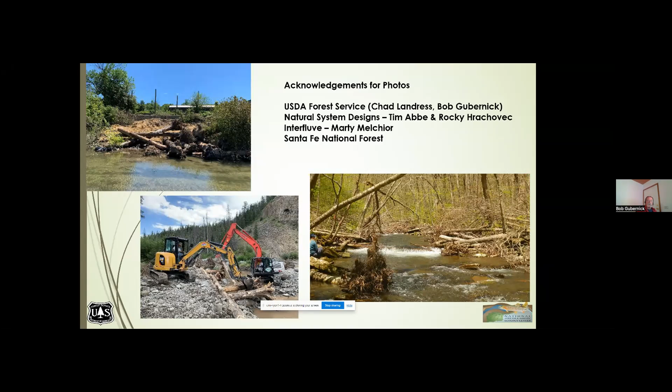I will go over a number of different things. I have photos given to me by some of the colleagues here that I am showing on this screen. So today I'm going to be talking a little bit about large wood history, large wood in streams, how it gets there, how it goes away, a little bit about design function and what you have to do for design, some anchoring methods, and then go into different large wood structure types and their purposes. So without further ado,

this is a graphic by Janine Castro and Colin Thorne, and it shows essentially the interaction between the geology, which overrides pretty much everything in channel form, the hydrology, which delivers the work on the geology, and the biologic component that takes the benefit from these two things. And what you see here in the graphic is that, depending upon where you're at, if you have high flows or low flows, and on the left you have stream power, which is just a function of discharge and width, and then the erosional resistance, which is a function of the geology.

And so the hydrology and the geology move the materials around depending upon channel gradient, and different biotic fish, benthic organisms and all can take advantage of some of these different things. Some of them, the biological species, will enjoy lower gradients, deeper pools, things like that. When you get to higher gradient channels, less so. Again, so this just shows, like I said, the interaction between the geology, the hydrology, and the biology.

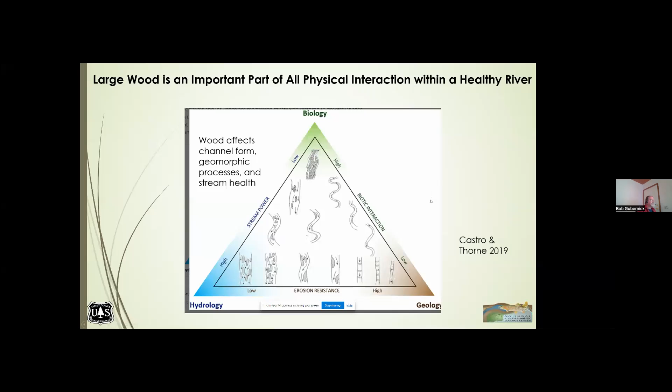What we do know is that many years ago, in Europe, it's going to be probably thousands of years ago, in the United States, it's about 150 years or so ago, we started removing wood in our rivers in a major way. And we did that to open up the rivers to navigation. And by doing so, we forever changed what these rivers look like and also how they responded. In the United States, we had railroads going up narrow channels. They moved channels over to the side. They simplified them. They splash dammed. And again, all of these changed the qualities of the river and how they look.

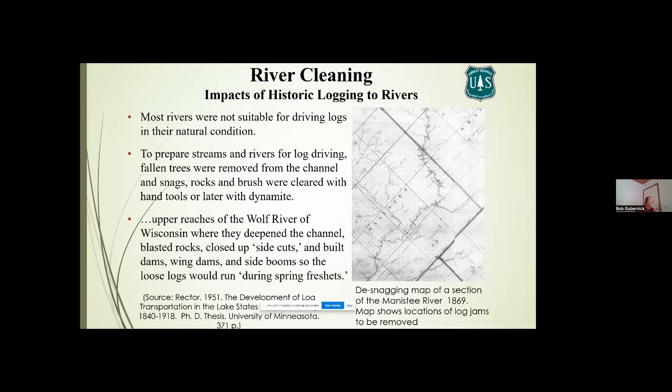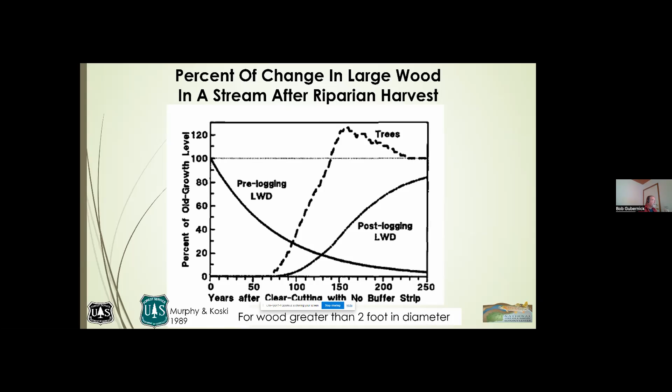Now, when you cut the riparian zone, conversely, you have wood that has to grow. And for the trees to get to the size that it's going to benefit the stream, you can see it takes a long time. It doesn't really start contributing that large wood till almost 80 years into the action. And so once you do this type of managed cut, the wood that is of the size that the river typically needs takes a very long time to regrow to be able to contribute. So we're looking at a 100 to 150 year cycle for this to occur. And I'll just show you the effects on that.

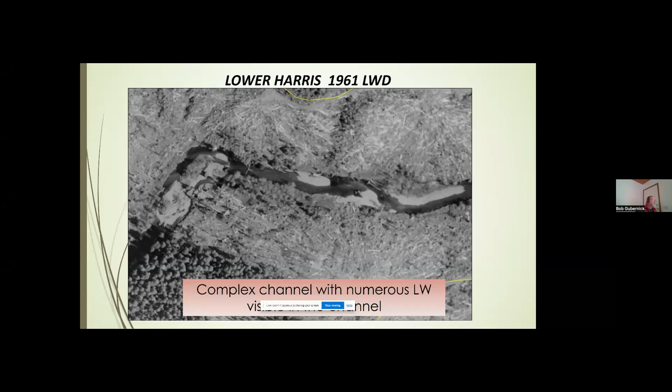This is in Alaska. This is a complex river channel in the Harris River. And this is a photo from 1961, right after the riparian zone was harvested in this area. And you can see all the wood in the channel, the complexity that you see, lots of different islands, wood in there forming different types of structures. So over time, another 50 years later, all that wood is now gone that you see in the channel, and it's become a very simplified single thread. And this is essentially the thing that we're trying to avoid.

The aquatic habitat requires that channel complexity, because within that channel complexity, different organisms are keying on that to increase their species in the stream itself. So in order to create that complex habitat that forms the deep pools, that forms the cover habitat, that sorts the gravel, you need to have wood throughout the entire history of that stream. So in some cases, it means we have to go back in there and intervene.

So one of the ways that nature intervenes is it has an event that puts large wood in the channel. So that can be a mass wasting event, such as a debris flow or a landslide. You have wind throw and the blowdown that gets into it. You have flooding that erodes banks and makes trees fall in. You have just the normal lateral migration process that rivers go through that eat in underneath the trees, and the trees fall in and start to contribute.

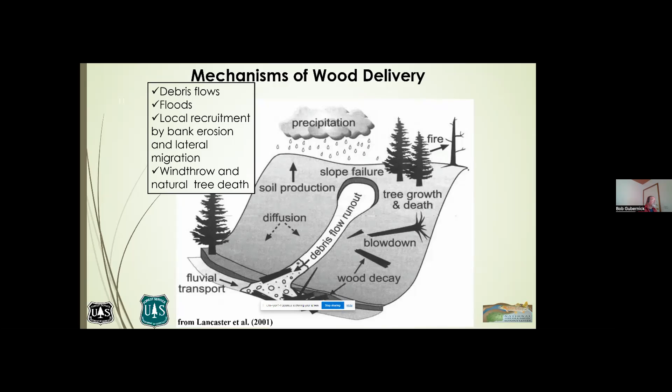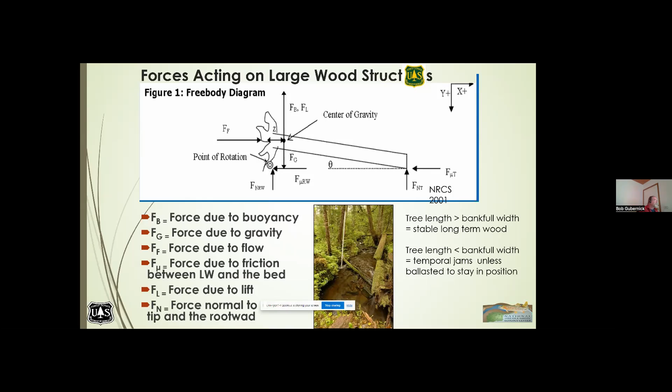However, you can work in these larger systems. You just need to do design, and they need to be ballasted properly to stay in place. Wood can be used in all of these locations, and you can make it stable as long as you understand the forces that are acting upon them. So I'm going to talk about three main forces, or three situations that you have to account for that do the most work on the structure.

So the first one is buoyancy. And we know that buoyancy is the flotation of the wood in the water. The wood weighs less than the amount of water it displaces, so it floats. So in order to keep the wood in place, you need to ballast it. And that ballast is done by a number of different methods, weight, entanglement, etc.

If you don't, once a certain amount of water goes up on the wood, it will get up and float away. And that's the last thing that you want to have happen if you're just doing a demonstration project. You want your wood to stay in place and you want it to work. So you have to ballast it against buoyant force.

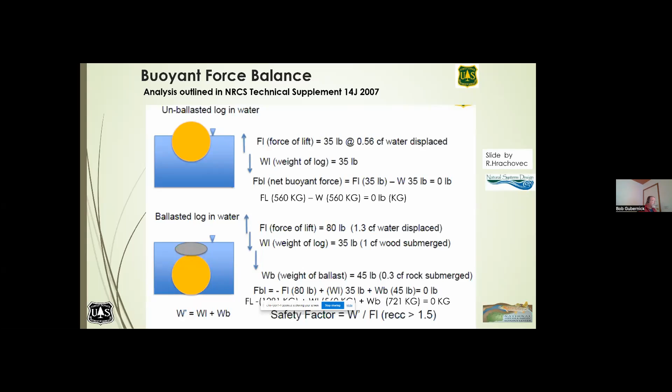So here's just the analysis. Again, simple. The density of wood times the volume of wood minus the density of water times the volume of water times the acceleration of gravity. And that is your buoyant force. And typically, we like to have a factor of safety of 1.5 when we're dealing with a buoyant force.

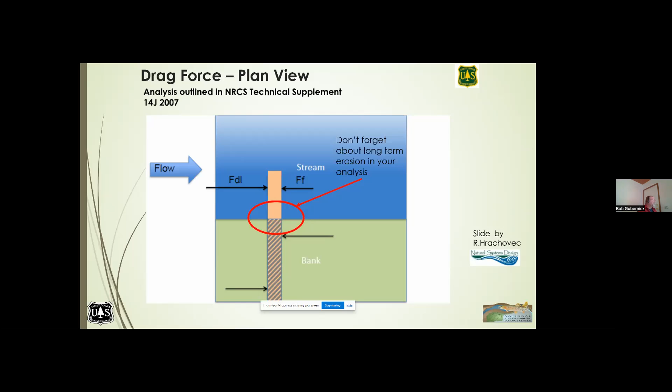Another force for those structures that stick out from the bank or that will capture a lot of material is drag force. And the thing with drag force is that you need to remember that the stream bank position changes in time. There's lateral migration, there's local erosion around there. So when you're doing your drag force analysis, you need to do it for the worst case scenario, how much further out you think the structure will stick, how much more cross-sectional area that it will take.

And the drag force, all of you have felt this when you've walked out in the stream and you feel that force of the water pushing against you. Again, that's a function of the water velocity, the area that you're blocking, and then the drag coefficient. And depending upon the structure that you're building and what you're building out of, there's different drag force coefficients.

Next one that you need to be concerned of is scour. Scour is very important because if you get too much scour underneath a structure or around a structure, you may have an overturning force that can cause the structure to fall in and rotate. The other thing that scour does is that it can cause your structure to start losing ballast materials.

If you have a lot of embedment and you scour up underneath your wood, the sediment that's ballasting it can fall out underneath, and you could lose enough of your ballast so that either drag force or buoyancy could cause your structure to lift and go away.

Again, when you're dealing with large amounts of rock material, scour abatement logs further underneath your structure are important to have. And again, understanding scour, lots of ways to calculate scour. Pretty much all of them are wrong. What we typically like to utilize is doing multiple methods.

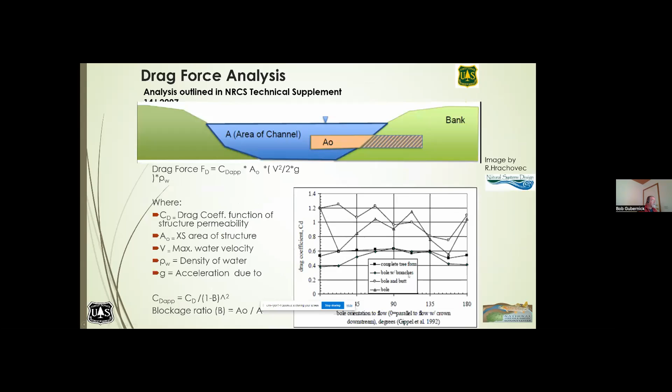So here's the drag force analysis. Again, function of velocity, density, acceleration of gravity, and the drag force coefficient. So in order to keep those down, you have to have ballast, some anchoring methodology. There's lots of ways

to anchor structures. You can embed them where you will essentially dig a trench and place the log in there and put the material over top, and there's enough material on the top to overcome the buoyancy of the wood and keep the wood in place. You can use piling. Piling are great.

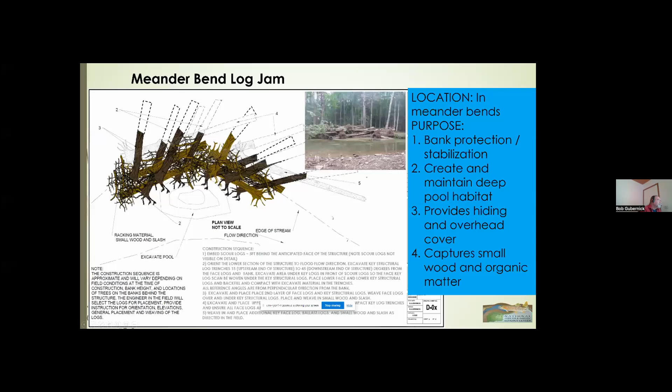Typically, the pools form in these structures from the apex downstream, which is the deepest portion of the pool. So you need to have good scour protection through there. They can be configured in numerous different ways. Here you see a plan view of a project that I did in Wisconsin. Essentially, I used whole trees, lattice worked them all together, and then used some of the bank materials when we laid the bank back to fill in some of the void space in there.

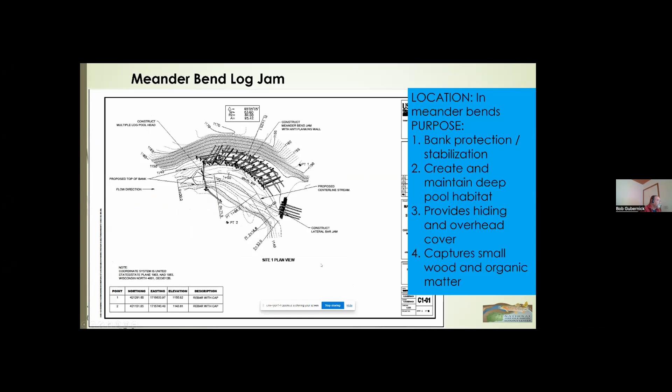Another one is the apex jam. Apex jams are used to form complex multi-threaded channels. They're used to protect islands, and they produce some great hiding cover and a small crescent-shaped pool that forms up above.

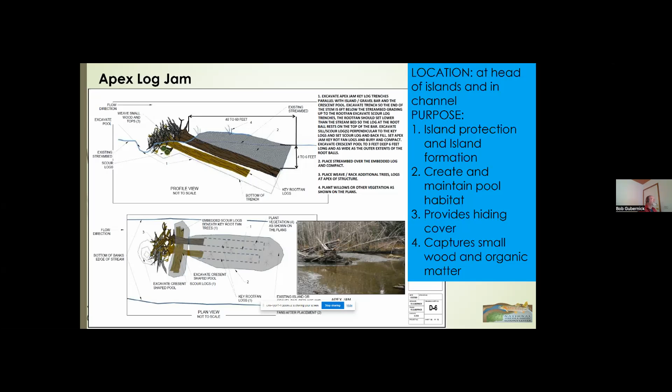These are bank building structures. If you have enough of them, essentially they function like a groin, so they provide a dead zone, an eddy behind the structure, and it mounds material in time. Typically when we're building that, the material we excavate out to place the wood in and bury it is mounded up behind there. But as the structure works, there's a low, no-velocity zone behind them, and material in suspension, kicked up during larger storms and bankfull events, mounds up on the backside of these. Slowly but surely, passively through time, it narrows the channel back up to proper width.

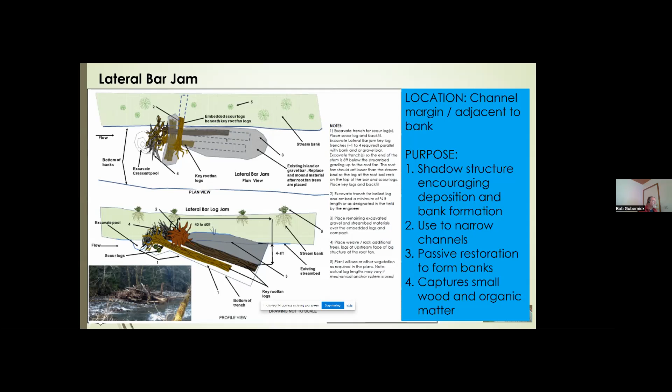Just an example from Pennsylvania for some recent ones that I built. Again, the size is scalable. In a low energy wetland type situation here where we're trying to narrow the channel, we're using the wood, and you don't need a huge amount of ballasting for the wood. There's not enough velocity, and with the piling and the weight of these things, it's really tough to move them. Plus, water doesn't get that deep across the wetland floodplain here. It's very large.

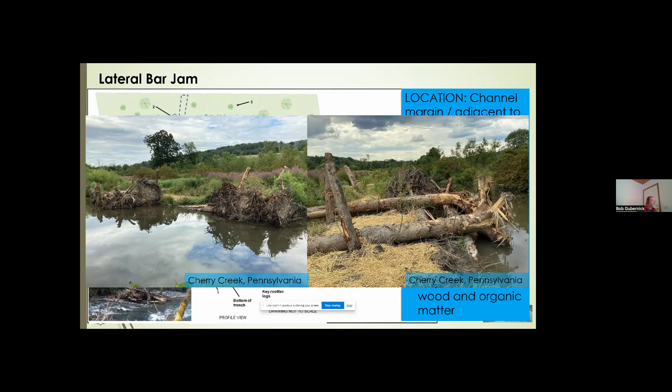Wood can also be used to provide protection for critical infrastructure. I've been using large wood upstream of bridges to help gather wood during storms, keeping it from plugging the orifice of the bridge or culvert downstream. I also use them to protect highways and other residential infrastructure.

The upper right-hand corner is a large, landslide-style deposit that you would see along the margins of an area where a landslide went through. This is essentially a really large mound of logs woven together, protecting a state highway behind that got blown out during a flood. The structure is designed so that the wood ballast is higher than the Q100 flood, and it's all woven together so that when water starts pushing on it, it locks the wood together, pushing it against one another even more, making it more difficult to remove.

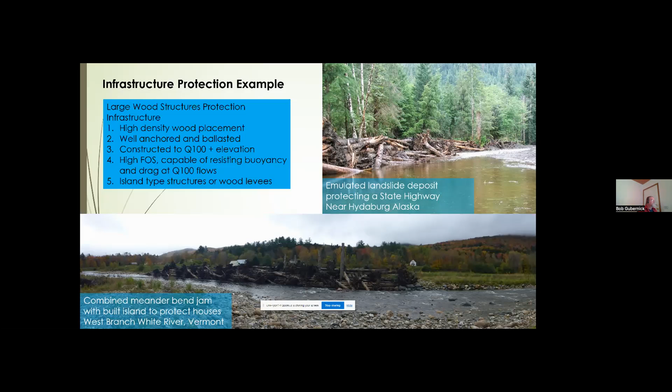A deflector jam is a redirective structure. You have log jams that are made to take the water and make it work locally. You also have log jams like this deflector jam, where the logs are oriented to redirect flow back towards the center of the channel. The deflectors are also used to capture more wood.

In this design, I have deflectors low and on the bed, and those are for utilization by aquatic organisms and to maintain a pool during lower water conditions. Then if you look up, there are other logs that stick up higher out of the stream, and those are to capture more wood and redirect flow away from the bank during higher storms, because we know that water flows perpendicular to the orientation of the wood at flood flow.

As with structures, when you have wood that sticks out, it captures material and makes these structures last longer. Wood structures, depending upon how fast they rot, the size of the material, and how much water they're in, whether above water most of the time or below, can have various shelf lives. I use larger pieces of wood because I want the efficacy of it lasting longer.

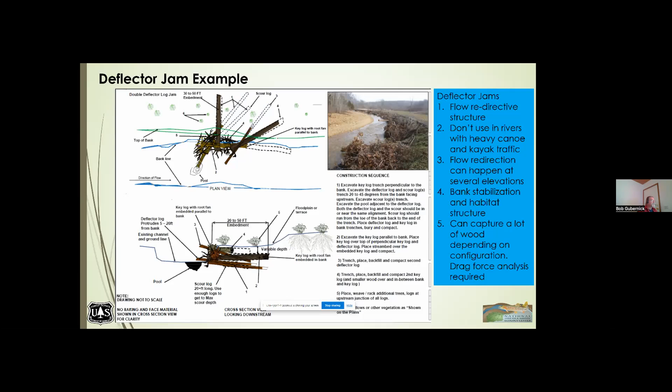Here are some examples. One up in Missouri—you can see the high logs up above, and the lower log in the water just causing a riffle down there. On these ones on the west branch of the White River, they're low-lying deflector jams, and you can see the large pools that form associated with them.

Cross-channel log jams, or cross-valley log jams, are really good structures when you have an incised channel that you're trying to bring up again. Essentially, you are providing enough wood roughness that the stream drops its bed load and begins to aggrade behind it.

When you work with these kinds of structures, you can't just think about the channel itself. You need to work across the floodplain more, because you're going to be increasing the depth of the sediment in the channel—that's the intent of this. When you do that, you're going to be reactivating the floodplain, and you want to make sure you're not causing a potential avulsion.

So we work these structures going from valley wall to valley wall in many cases. They are not necessarily always essentially a log dam type structure—they are porous. In time, they can plug up and backfill. Most of the time, they fill up with sediment and capture some sticks. There are places on there that are still porous, but material accumulates up above because it really slows velocity and changes the hydraulic gradient of the water surface, and essentially it drops its load back there.

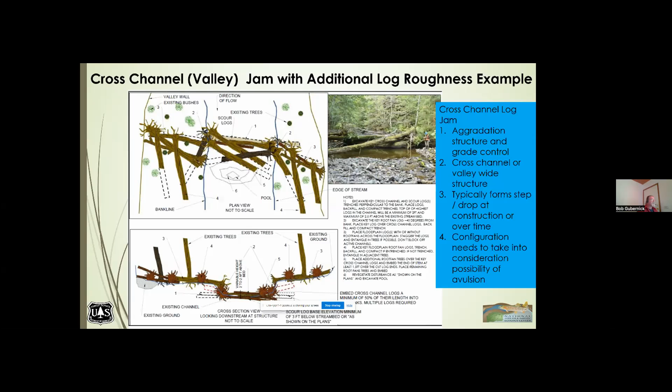Here we see some old wood in the channel, essentially forming a cross-channel jam. You have one that the water flows over most of the time, the one down in the bed, and you can see another log that's up above, suspended on the bank.

The wood is embedded in the channel, or entangled in the trees, or of large enough mass, that it's not going to move.

As we move smaller down, you could use bits and pieces of trees and root wads with stems attached to form toe wood structures. I like toe wood structures, they're amenable to small streams. Essentially what they are is a bunch of wood, logs, root fans, all chunked up and placed down to scour depth into the bank. And then you build a coir fabric soil wrap bank on top of that, and that is vegetated. There's lots of void space underneath these types of structures. Like I said, they work real well.

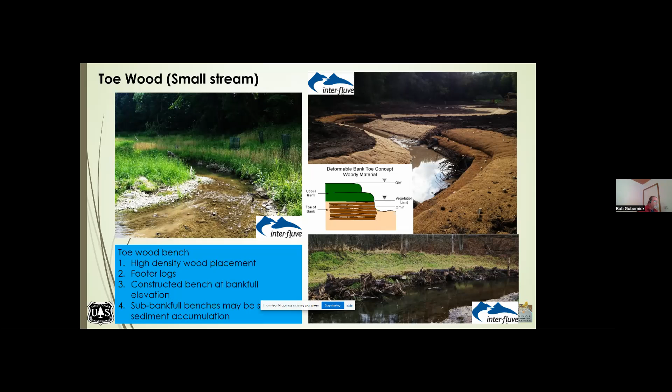I built a large river variant of toe wood. Toe wood again was meant for smaller streams, but I use it on very large rivers, and essentially what I make is a large wood raft, and I build the bank up on top of that. These logs are sized so that they go back. I understand that I'm going to get some scour, but they're embedded deep enough that they never fall in.

There is a set of scour logs placed probably about a third of the way back from the face, and the logs are placed over top of that. Then you use logs and root fans and small logs to chink in. You'll put fabric down, put your soil material down with fascines, and build that repetitively going up. You can see what it looks like in the lower right-hand corner. Those logs that stick out are ice fenders.

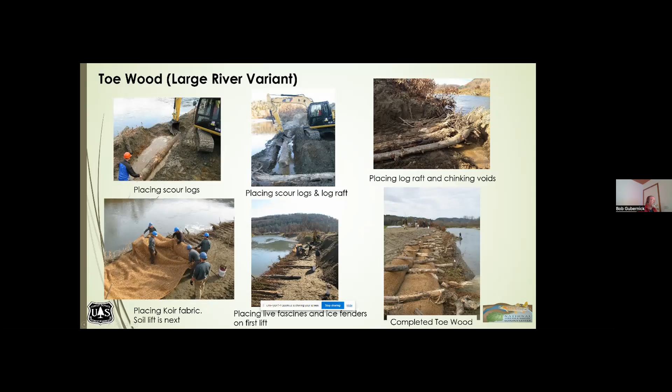And here's a picture of what it looks like once it's completed and after years of construction.

Then you could do beaver dam analogues. Joe Wheaton's pioneered this. It works very well in historic areas where there's been beaver that have been extirpated from trapping and historic management. It's a structure that's small, hand done, used to back up water and retain more water on top of the wetlands. We use it a lot in the West.

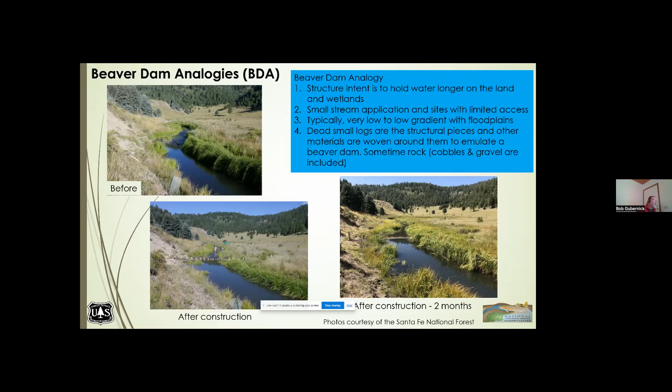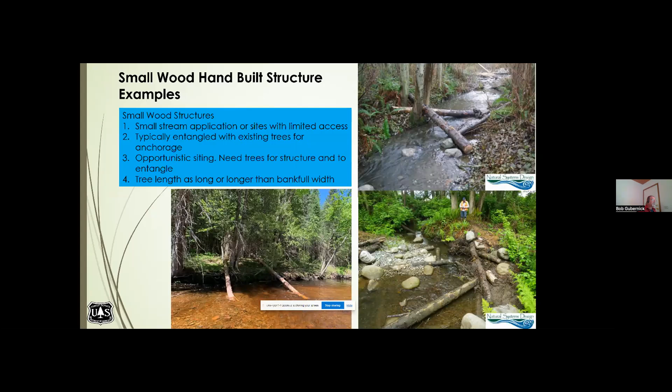And then you could build small hand structures. Those hand structures, again, are placed with human beings. They're typically entangled and not embedded, and you have to do them where you have trees and can get them. So it's a very opportunistic style, it's very cheap in nature, hand crews can make this.

We typically build these with grip hoists, block and tackle, entangled in the trees. Again, they work really well, but they do require some design. You need to know how big of a tree you need to overcome ballast, and you need to site them in places where you can entangle them so they're not going to get washed downstream, because a lot of times they're just strictly cut logs.

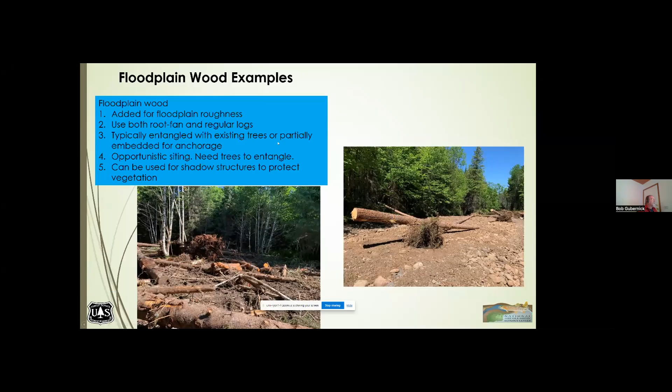And then the other thing is placing wood on the floodplain. Don't just work in the channel, utilize it all the way across the floodplain. And with that, you can use fascines also, again small bundles of sticks and twigs.

So with that, I will entertain any questions.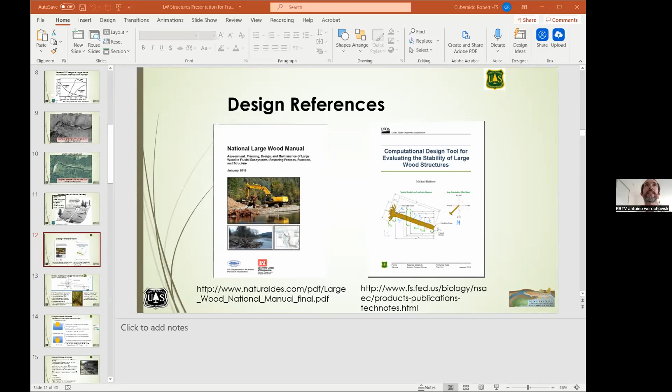Thank you for that presentation. So there are challenges for 2 banks, and we don't want the plots to be modified. We don't want any loss of surface. These methods with wood, can they be applied, or should we always think about the movements of the bed, erosion of the bed with that kind of event? Your stream bed is, if I'm understanding.

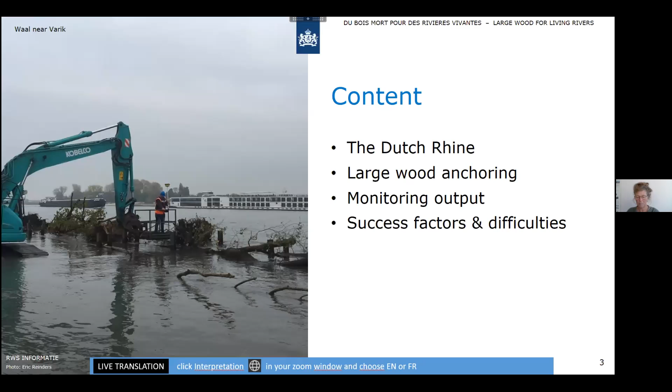The Rhine is the largest river in Western Europe. It's one of the busiest shipping routes in the world, and it connects the harbor of Rotterdam with the industrial Ruhr area in Germany. In Holland, or the Netherlands, there are 3 main Rhine branches in the Rhine Delta. I give you some photos.

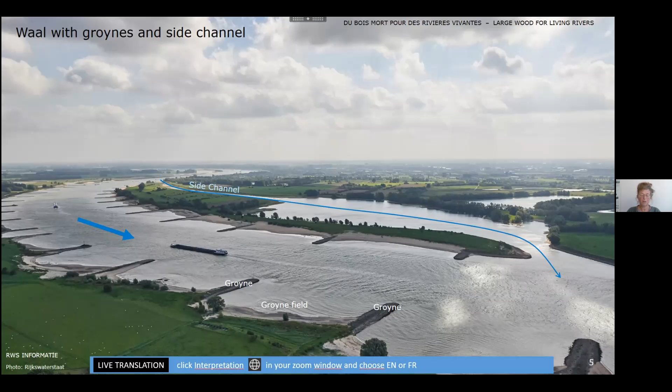The Dutch Rhine is a strongly regulated sandbed river with groynes, which makes the river smaller and deeper. Most ships sail in the Waal branch, which is the main shipping route. There is a 10-kilometer stretch in the River Waal with a longitudinal training dam, which separates the side channel from the main channel. So in that place, we break down the groynes.

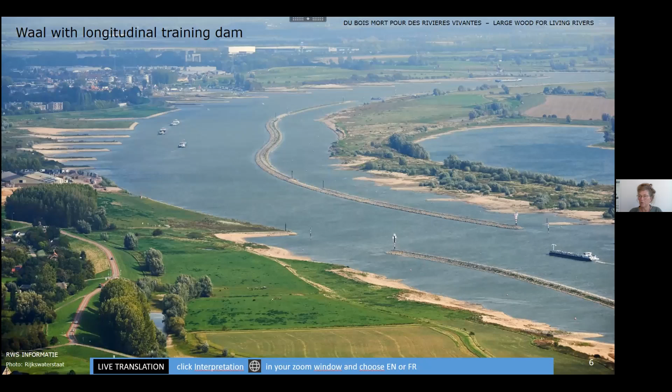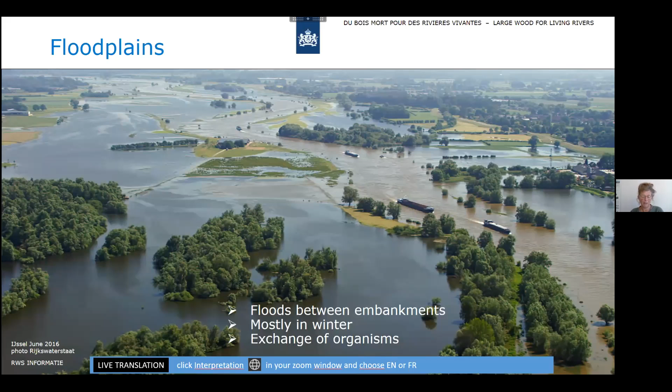We do have floodplains, embanked floodplains, which are flooded nearly every winter. This is a photo of a summer flood in 2016. And these floods are important for ecology because during floods, there is an exchange of aquatic organisms between the river and the floodplain.

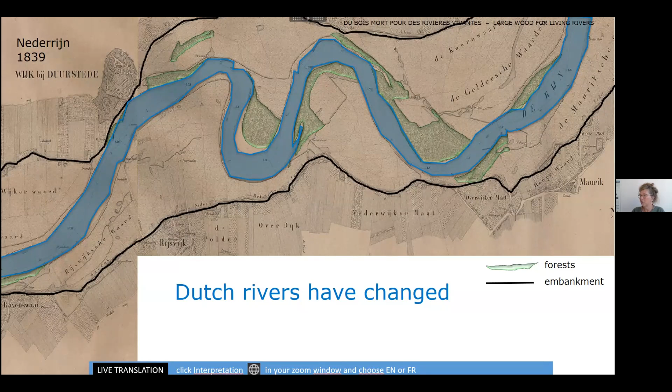The Dutch rivers, as the Rhine, have changed a lot. By the 19th century already, the floodplain consisted mainly of grassland. There were still substantial plots of forest, often planted for land reclamation. You can see this on this old map. The river was regulated and most of the riparian forest disappeared over time. With it, this valuable habitat also disappeared.

The Netherlands is a densely populated country, and you can imagine the risks of flooding are high. Therefore, flood protection is of great concern. And as trees in the floodplain rise to flood levels, they are now actively removed from the floodplain area. So there's little riparian forest left.

For 30 years already, the Netherlands has been restoring the Rhine. This gained momentum with the Water Framework Directive in 2000. More waters in the floodplain were reconnected with the river. The transition from water to land was made more gradual, so there's now always shallow water. And large wood is added to increase the habitat variety.

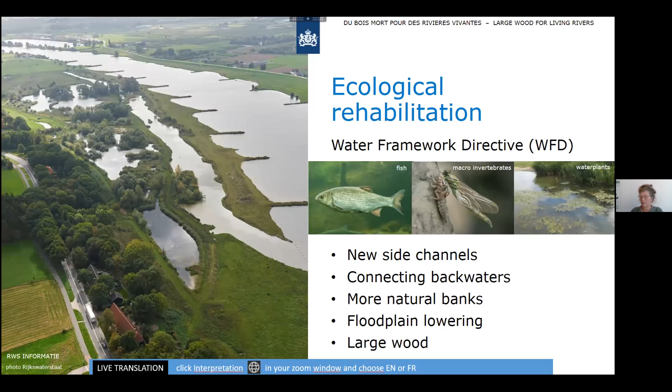But keep in mind, these are very large rivers. So we have about, I think, 150 kilometers of rivers and then 200 trees, maybe not so much, but that should be finished before 2027.

A floating tree is considered a safety hazard for shipping in the Netherlands. It mustn't get into the propeller of a ship, and if an accident occurs due to collision of a ship with a tree, it minimizes the chance of successful progress of the reintroduction of wood. Therefore, we ensure proper anchoring of the wood. Otherwise, we wouldn't have gotten permission either.

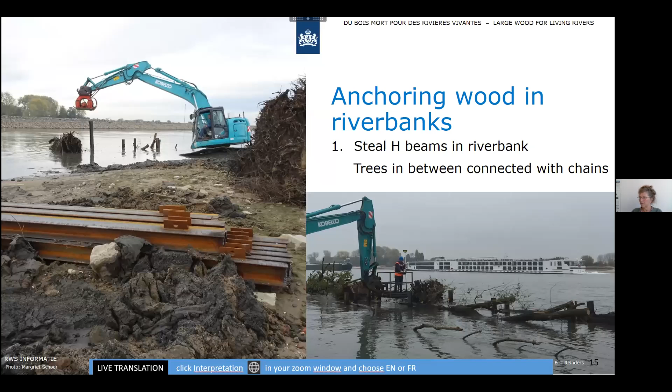The trees have a pin through the trunk, and on each side of the trunk, there are two eyelets, and a sturdy chain goes through them to attach the tree to the beams. And then each tree is attached in 2 or 3 places to be sure that it stays in its place.

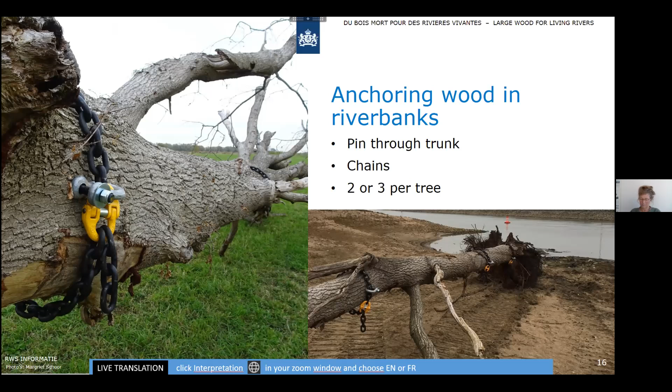Another method we used is with ballast. We ballast the tree with concrete slabs, 2 of them. And the chains are attached to eyes in these plates. And the required weight of the plates is calculated, just like Bob told, taking into account the buoyancy of the tree.

But luckily, when we use a tree in a side channel, the anchorage is less steady. Because if a tree becomes detached in a side channel, the risk of collision with a vessel is reduced. And after all, the wood cannot float out of the channel very easily, and therefore the anchorage is lighter, and that is cheaper.

For example, the chains are less heavy. Steel cable is sometimes used. Sometimes the cables are only around the trees and not through them. We use fewer beams, and sometimes wooden beams are used. We are still in a phase of trial and error.

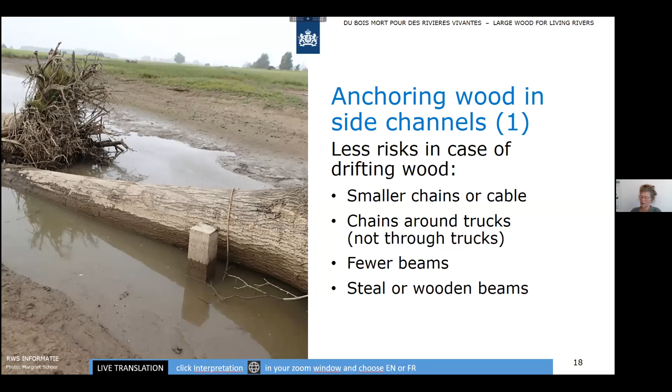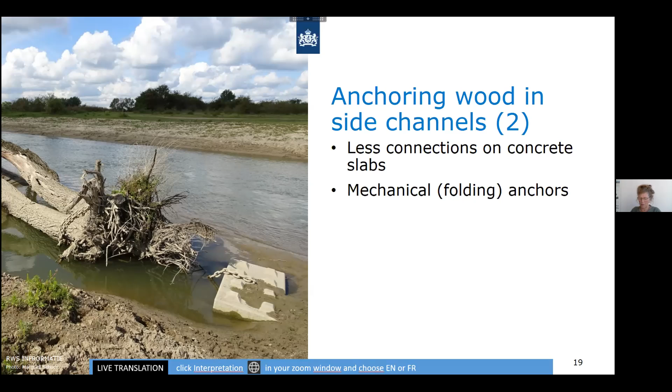We also use concrete slabs in the side channels, and also mechanical anchors; folding anchors are used. I don't have a picture of them because they're in the bottom of the water. The trees are intended to be underwater. That is where they have the greatest ecological effect, we think. In addition, they rot less quickly there. And in impounded rivers with a fixed water level, that's easy to achieve.

But in the Rhine branch and the IJssel, the difference between the average water level and the low water level is often much more than 2 meters. And therefore, we lay the trees at different depths. You can see it on the photo. If the trees are too deep, we think that no light can reach them, and then no algae will grow on them, and then the ecological effect is maybe less.

And then the other thing is that side channels can fall dry at low water stages, and then the trees get dry and they rot more often. But we don't know yet, because we are doing this only, I think, 7 years now.

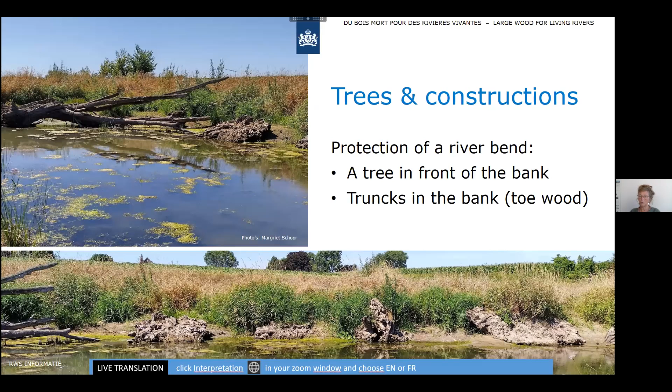We used some constructions, for instance, the protection of a river bend. Bob told it too. On the photo down, you can see the root ball of the logs. The logs are pushed into the bank. And this is in a very curved bend, but there was no erosion, so we think it works. Nothing happens. It's good to try. I think we should do more, because we still use a lot of stones in other places.

Another construction we made was a wooden construction to influence the sediment transport. It's placed in a very shallow bend of the river, and 4 wooden screens have been made, and the logs lie between these wooden pillars. There we used larch, and the pillars are 8 meters long and 6 meters into the riverbed.

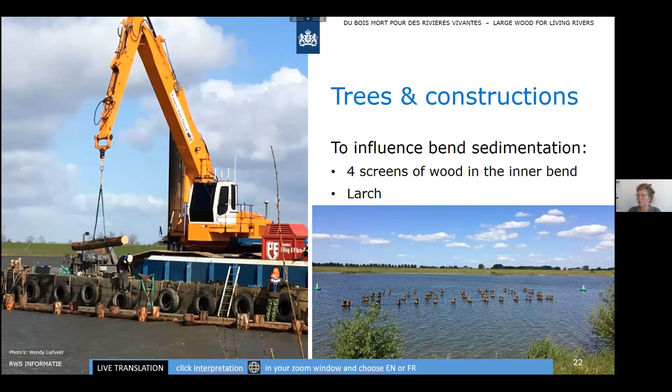I try to recognize some success factors of the project. An important factor in the placing of large wood in the navigable Rhine is that we take safety very seriously. We work with engineers who advise on nautical safety and flood safety. And for us, that's quite easy, because they're my colleagues. I see them during lunch. They could be working next to my desk. In consultation with them, we do not place wood in the waterway itself, so always in the banks or in side channels. And the closer to the waterway, the better the anchoring.

We also did some calculations on the flood safety, hydraulic calculations, and this sometimes limits the amount of trees per plot we could use. So I'm really a bit jealous of the photos Bob showed us.

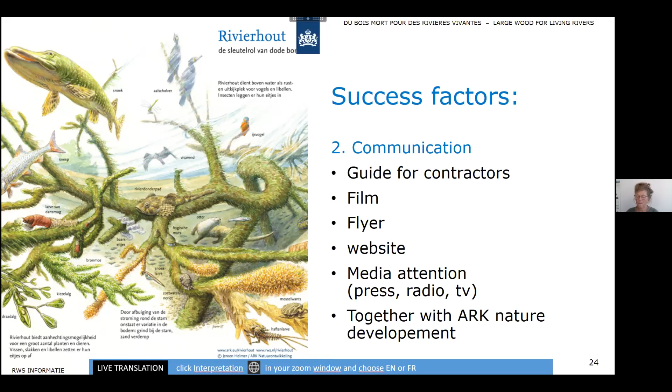The third thing is that we started small in a river branch with little shipping. And that didn't cause any problems, and people got used to it. And we were able to scale it up into ongoing projects for nature development and projects for flood protection.

And the last success factor, I think, is that we monitored. We monitored macroinvertebrates, fish, and morphology. And we measured the effect of the wood on aquatic organisms. And in doing so, we fed the communication, and we also improved the implementation. And we always said, when it doesn't work, we will stop.

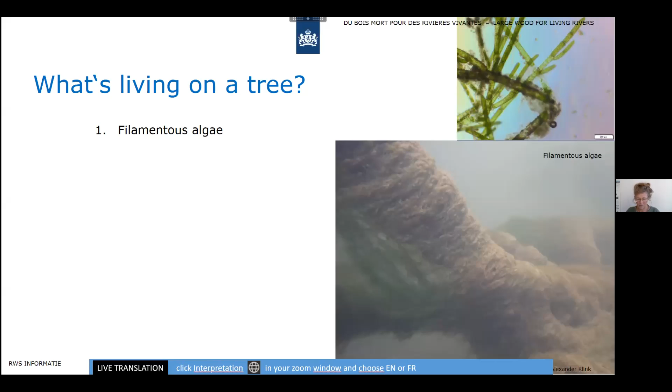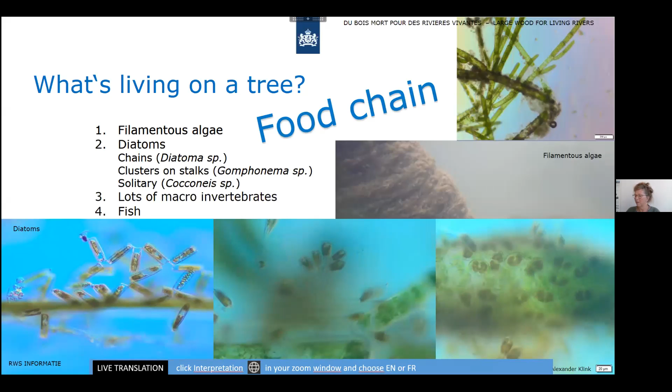Then I want to show something about the monitoring: what's living on a tree we used. After some months in the water, the wood is covered by filamentous algae. And on this algae, we find diatoms. And the diatoms were food for lots of macroinvertebrates, and they were eaten by fish. So the whole food chain gets a boost. And the boost of the food chain plays a key role in the ecological recovery.

It's not only a suitable attachment site for algae, but also for mosses, sponges, and eggs for fish. And fish can hide in the branches because we use not only logs with roots, but also with branches. And the wood also provides flow variation, Bob told that already, which in turn gives variation in sediment from gravel. And together it makes the river wood, we call it river wood, a suitable habitat for more different species. And in addition, the wood is also partly above the water, and it provides a landing site for birds and insects.

My computer battery is a bit low, and I talk quicker because I think it's a problem. I thought it was automatic.

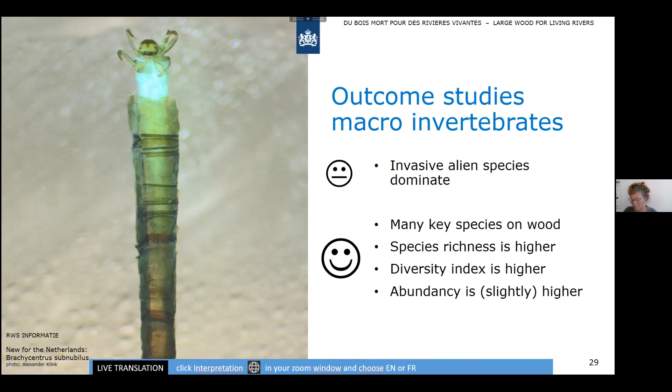We have a lot of invasive alien species in the Rhine, and they're also dominating on the wood. But looking into the native species, we found on the wood many target species, characteristic for flowing water. However, these were mainly chironomids, that are non-biting midges, but also some caddisflies like the one on the photo on the left, which was new in the Netherlands. And the species richness on the wood was higher than on the stones, and so was the Shannon-Wiener diversity index. We find that a good result.

We also did some fish surveys and saw that the fish use the river wood as a nursery area, a foraging area, and a shelter area. And near the wood were fewer non-native species such as gobies, and species diversity is higher there.

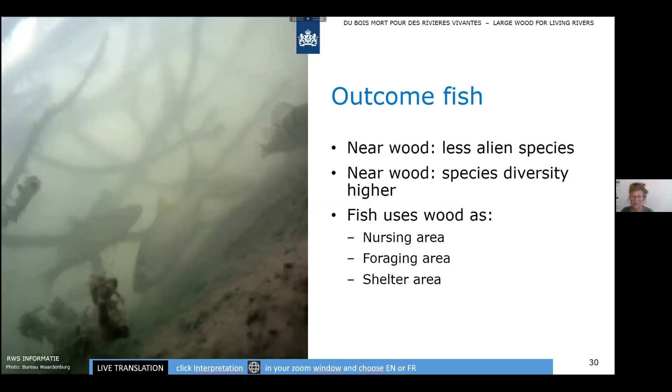As expected, large wood in side channels affects the morphology of the side channel. At low water level, we could see this very well. We saw scour pits due to erosion near the trees. But we also saw sand deposits near the trees, and in many places in these side channels, the rest of the bed consists of silt, so that was more variation.

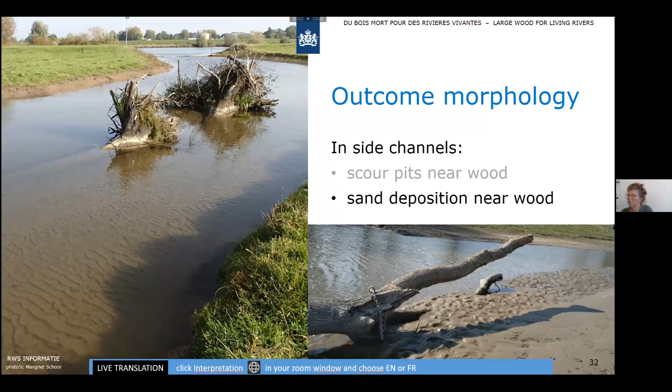This summer, the Rhine was extremely low, and this also allowed us to see the large wood in the shore channels behind the longitudinal dams. These trees are normally very deep and usually hardly any branches stick out above the water. But now we saw gravel sedimentation there in addition to sand. In the shore channel, the water flows faster than in the side channels, so that explains the gravel. And we could see that despite being deep, filamentous algae were growing on these trees too.

Maybe we should ask ourselves how long it takes until the tree is totally buried under the sediment. And then we could place another tree above it.

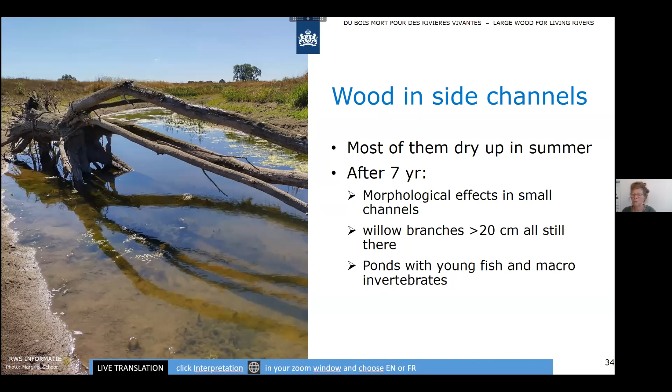An important observation was that after 7 years of being underwater and above the water, even the softwood of the willows and the poplars, like on the photo, did not rot away enormously. All branches thicker than 20 centimeters were still present and sturdy; smaller branches, however, often disappeared. We always say that the tree itself should be at least 40 centimeters, because we don't want to bring a new tree every 5 years.

Of course, there were difficulties too. We want to use trees with branches and root ball, but they are hard to come by. And using large trees and our preference for hardwood, such as oak, also results in high transport costs. And the permit process takes a long time. And we have to consider safety of canoeists and swimmers.

Another factor is that in the beginning, we didn't take into account the cost of signage. And we have only just started organizing the inspection and taking into account its costs. And some trees are now lying too high due to the low water level of the Rhine.

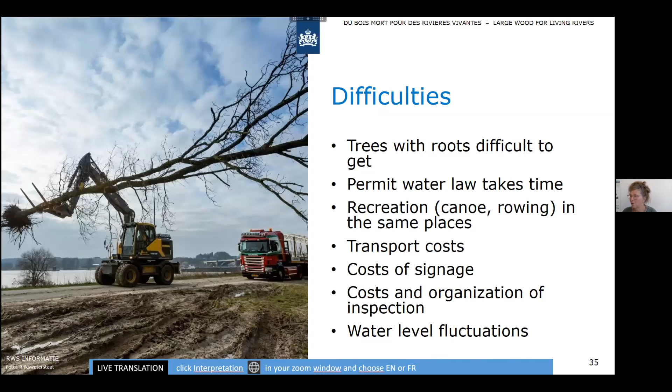So monitoring means that we are constantly learning, and that's important. We will now inspect once every 3 years, and we will replace if necessary, on the riverbanks more often than in the side channels.

So, to conclude, even in rivers with navigation it is possible and effective to place large wood. It requires more and good anchoring and signaling. Despite the wood being relatively small in a large river, there is a local effect on morphology, and together with the wood as substrate, it increases habitat variation and thus species variation. Colonization from upstream has brought in species that previously couldn't find a suitable habitat in the Dutch Rhine.

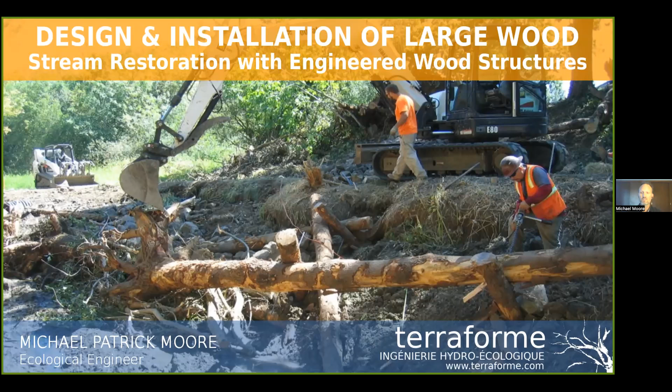Oh, it's going the wrong direction there. So, as my longtime friend, colleague, and mentor Matt Cruiser surveys the scene, doing what he does best as lead construction manager for Biohabitats and a conservation biologist, we'll look quickly at an overview of this talk.

I'm going to probably complement the previous talks by adding a more anecdotal and conceptual overview, walking through what a project looks like, establishing its objectives and what potential objectives might be, and then how those objectives are converted into design and construction considerations. I'll then look at different basic building units that go into these structures, and then at a couple of project examples of how these units come together.

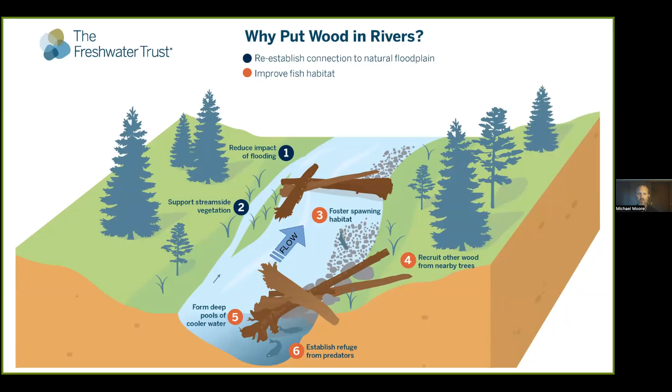So why put wood in rivers? This is a fantastic graphic from the Freshwater Trust that displays a lot of elements we've already heard about: complexity, reconnecting the stream to the floodplain, creating pools and spatial contexts for habitat, sorting sediments. All of that comes down to the complexity that's been brought up over and over in the past couple talks - the interaction of hydraulic and morphological complexity.

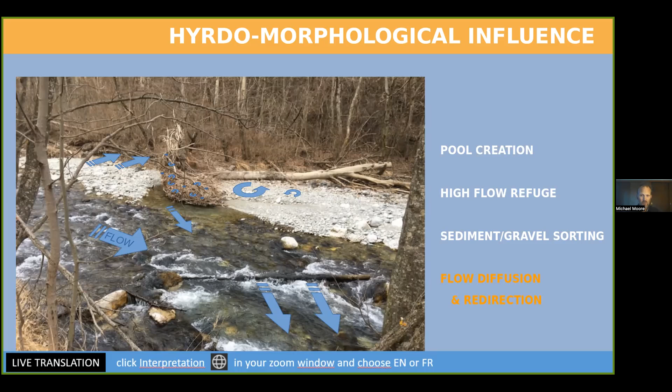These are the types of things we want to be thinking about when designing with intention—bringing all these concepts into a particular site, understanding what the objectives might be or what might be possible in a project. We want to think about flow: what does it look like, and how can we modify it through redirection, dissipation, and potentially flood storage?

We want to look at whether water quality is an issue, how we want sediment to be impacted—whether increasing sediment by directing flow into embankments, or stabilizing embankments to reduce sediment for water quality purposes—and again, the sorting of sediments as a possibility.

Looking at existing biota—what species are native or invasive, who's preying on who, and how we can avoid predation of target species—and the habitat needs of those different species. A point Margriet raised, which is often overlooked in these projects, is the opportunity for education and acculturation around this practice.

In a lot of places in the world, wood in rivers is not seen as a good thing by public opinion. So when people see wood in rivers, they ask questions, and that provides opportunities to communicate how river systems work, how complexity benefits those systems, and to help people connect with the systems they live in.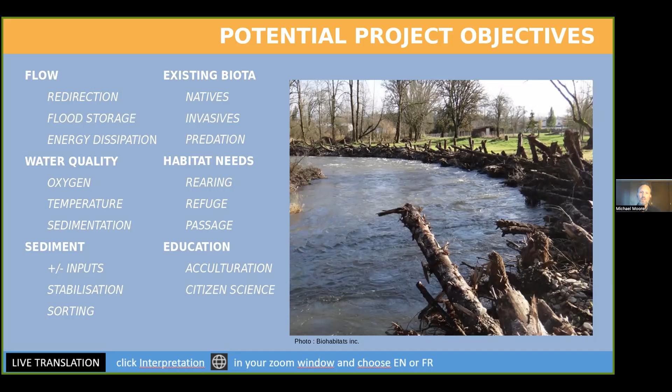From these potential objectives, we move toward design considerations.

So I'll go through a list of potential design considerations. First of all, looking at infrastructure.

Our site selection will be directly related to what structures are downstream or along the lateral portions of the sites that we're looking to restore—the presence and dimensions of those structures, who's managing them, and what tools they have available for that kind of management. We'll be looking at flow regimes, of course, as with any project in the waterways.

We want to be looking at the forces imparted by the flow as they act on the structures we install, as well as on the sediment associated with the project reach. Commonly we look at the 2-year flow as well as the 100-year flow to understand those forces, as well as the water surface elevations we can expect.

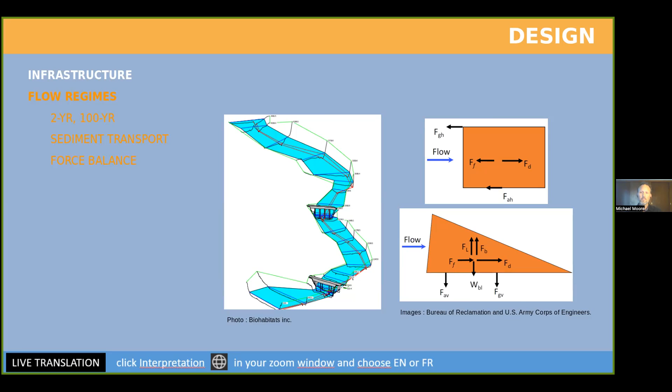In terms of habitat development, we want to consider which species we're targeting and where those species can benefit the most within the system. One important consideration is whether in-channel habitat or off-channel habitat will most benefit the species we're targeting. There are studies that have shown that...

Salmon specifically, but many species who have access to the floodplain, are much larger ultimately in their development and in different life stages, and therefore much more resilient, ultimately, in reproducing.

We want to be looking at existing wood and trees in the system. Bob had mentioned entanglement, so can we use existing trees to stabilize the structures we want to install? Do we want to be planting forests where they're not already present, so the riparian zone can continue to supply wood over the long term, replacing the wood we've installed? And can we expect wood to move downstream that will be recruited by the structures we're installing?

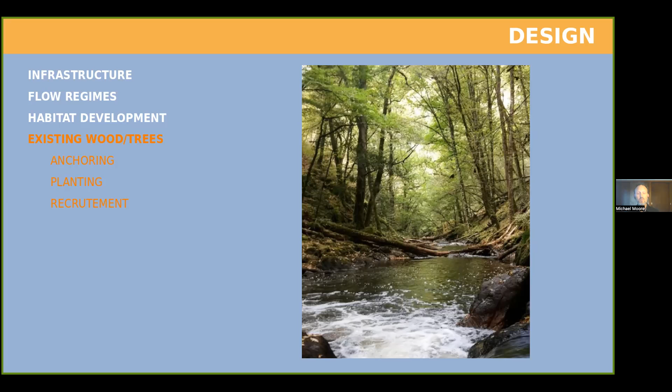Then there's flow redirection. Do we want to direct flow into embankments to increase the presence of certain sediments, or away from embankments that need protection? Are there side channels or off-channel habitat that can be activated by using logs in a certain orientation to move water where we want it?

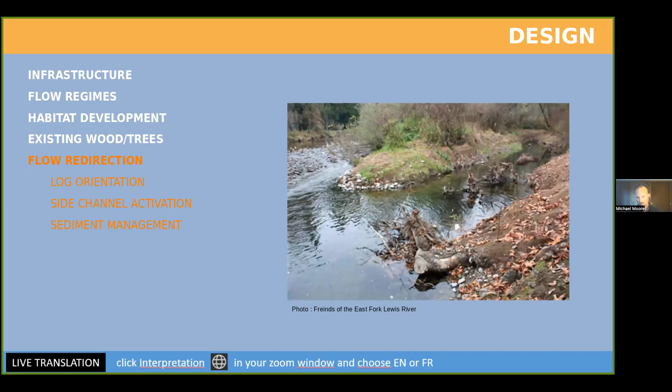And then anchoring and ballasting—I know this is something we all really want to get our heads around. What kind of stability can we expect from these structures, and what methods can we use to have confidence, and so that our project owners and stakeholders can have confidence in the stability of this work?

So looking at buoyancy, looking at the geology, understanding if bedrock will be a limitation in the vertical direction for implanting piles. Are we going to be using boulders exclusively for ballast, or is there a requirement for hardware? And what sizing will we need to use?

And then project evolution—looking at these projects with the intention of initiating natural processes that are otherwise missing from the system, processes that exist over long periods of time. So what will this project look like next year, in 5 years, in 10 years, in 50 years? What impact will wood decay have?

Will there be more contributions from the live wood existing in the system? And what happens if there's a 100-year flood next year? Are there failure modes we can plan for so that our structures will stay in place for as long as possible?

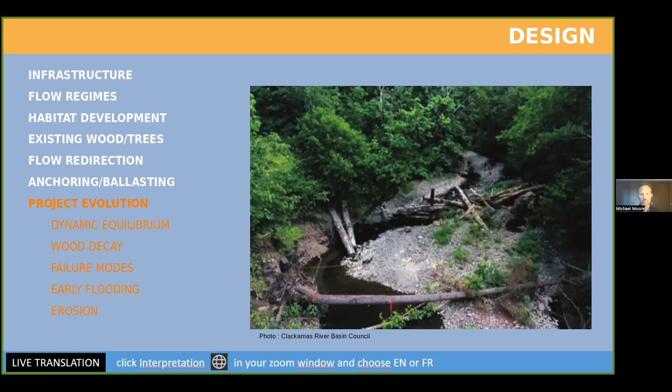And then this separate slide really puts an emphasis on the idea that within the design process, we want to be thinking about the construction process as well.

There are a number of factors in constructing these that are important for any project in a waterway. But for these projects, because we're often working in sensitive environments where access is difficult, we immediately want to be thinking, in the first steps, about how the machines and transport vehicles will access the site. How will we be moving materials from this place to that? How will the excavator be sitting on the embankment when it's digging in a root wad, for example?

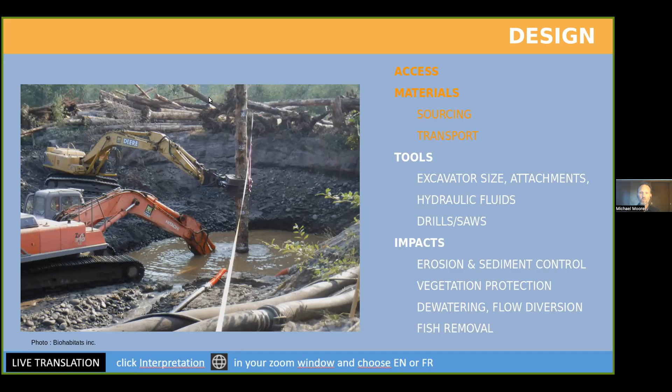Each structure will need that level of consideration. Each piece of wood and each element of the structure will have to have this thought through—how are we going to get this piece done within the constraints of the sensitive environments we're working in?

So moving on real quickly to the basic materials units, and I'll move through this quickly so that we can get down to the project examples.

We have 4 basic elements that I'd like to introduce here. First of all, root wads that we've talked about—these are logs with the root fans attached—and then logs without the root wads attached. There are also pin piles and brush.

What you have is a diversity of scale here. Logs can be anywhere from 30 to 60 centimeters in diameter and 5 to 7 meters long. A pin pile is more like 25 to 30 centimeters in diameter and 3 to 5 meters long, so it can be easily manipulated and driven into the ground. Brush is all the fine sticks and slash, the material generated by producing these units. We take that with us and stuff it under these structures to provide that smaller scale complexity I was talking about earlier.

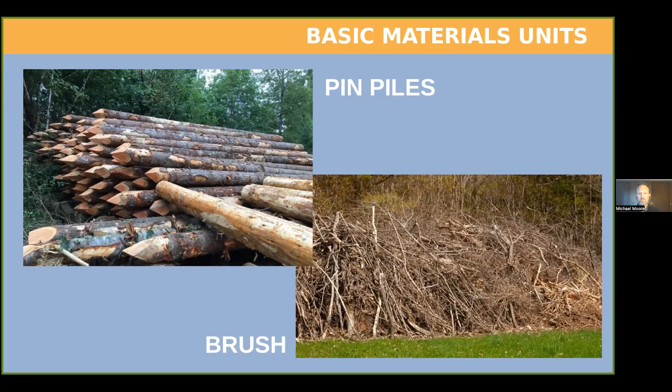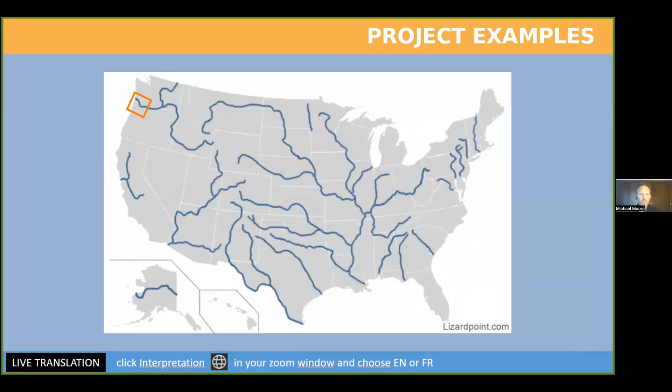So how do these elements come together? I wanted to talk about two project examples, zooming in more closely to the mouth of the Columbia River on the border between Oregon to the south and Washington to the north.

This first project is a habitat restoration project on Rock Creek. Rock Creek is a tributary to the Clackamas River, which contributes to the Willamette River, then ultimately into the Columbia River and out to the ocean. The Clackamas River Basin Council owned this project and hoped to improve habitat quality and upstream mobility of salmon species in this reach.

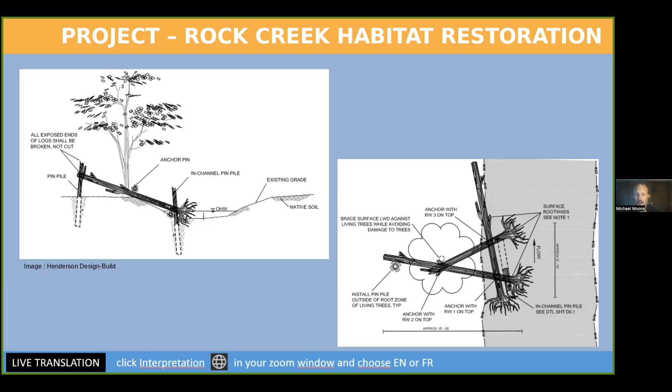Okay, now moving on to the second project, now on the left bank of the Willamette River in Fanno Creek. This is in a highly suburban area in Tualatin, west of Portland. The project owner, Tualatin Hills Parks and Recreation District, wanted to protect a trail that runs through a park along Fanno Creek. And you can see how erosion is threatening the stability of that trail. And so they requested that we come up with a solution that would include wood.

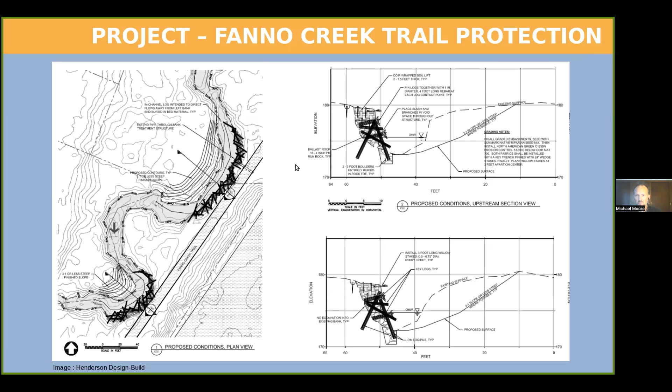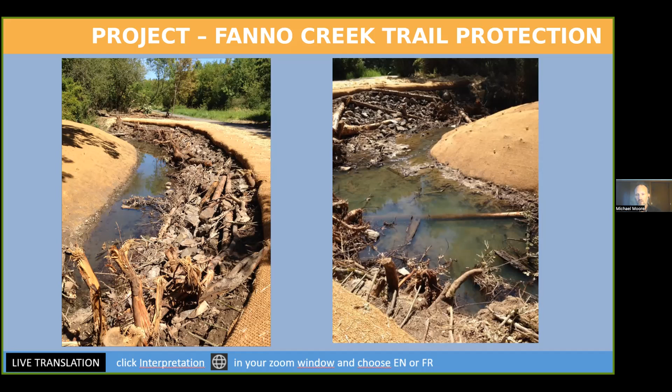Also, you can see just under the soil lift that's over the top of the structure, there are willow cuttings that have been laid in beneath. And there will be an entire planting campaign that goes in over this, as Bob mentioned, because it's critical to make sure that the vegetation that is planted takes hold before this really takes on a heavy flow. And so here's some pictures. That next season, once the storms had a chance to come in and move through the system, you can see that sediments have been deposited, showing evidence that there has been a reduction in velocities and more stability.